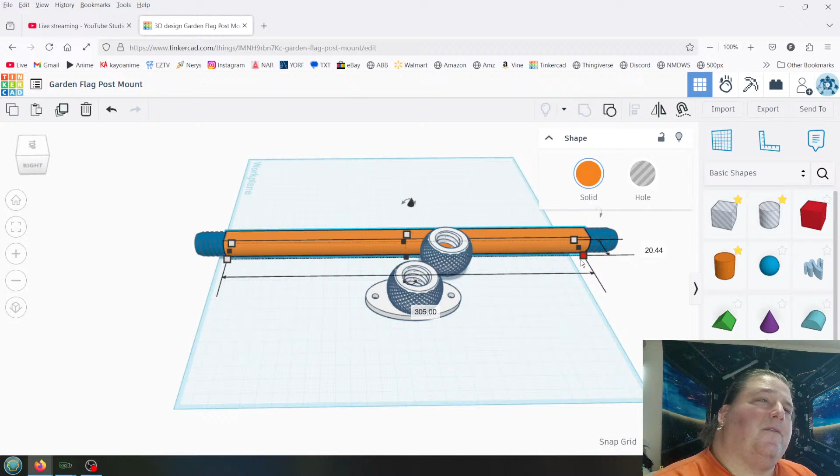So this is, actually I gotta split this. So this ultimately has to be, I can just trim this. You guys can't see what I'm doing, of course. So this has to stay 305 millimeters long.

Nice. You can get slightly cheaper than that. What really annoys me is that the company I'm with...

The tablet, I actually got a SIM card for the tablet. $10 for 10 gigabytes, data only. Which is fine, the likelihood of me using more than 10 gigabytes is very small, because I'm mostly on Wi-Fi. But they also have a $5 no-data plan that comes with unlimited minutes and texts. Why don't they give me both? $15, unlimited talk and text, 10 gigabytes of data - it's the same price, but I have to use 2 separate devices to get that. Unless I can find a triple SIM phone, where I could put 2 SIMs in it plus an SD card. Usually phones are dual SIM, but one is a dual-purpose SIM or SD card slot, and I need the SD card because I have a 500 gigabyte SD card in my phone and I use it.

Good afternoon, 3D Medic Vince.

I wish there was a way I could merge those 2 plans because $15 a month would be perfect, it's everything I need. So right now - and it looks like it did finally reset, the phone looks like it's working again - I'm paying $9.25. Oh, there's plenty of triple SIM devices for phone. The tablet doesn't need a triple SIM, I don't need phone calls on that. But there's plenty, there's even quad SIM phones. But I need a flagship phone with triple SIM so that I can have my SD card plus my 2 SIMs, because then I could just have 2 separate SIMs. But right now I'm paying $9.25 a month, and I get 1,000 minutes, unlimited text, and 4.5 gigabytes of data. I typically don't go over 2.5, 3 gigabytes of data per month, so that should be plenty. And because I work from home, I'm mostly on Wi-Fi.

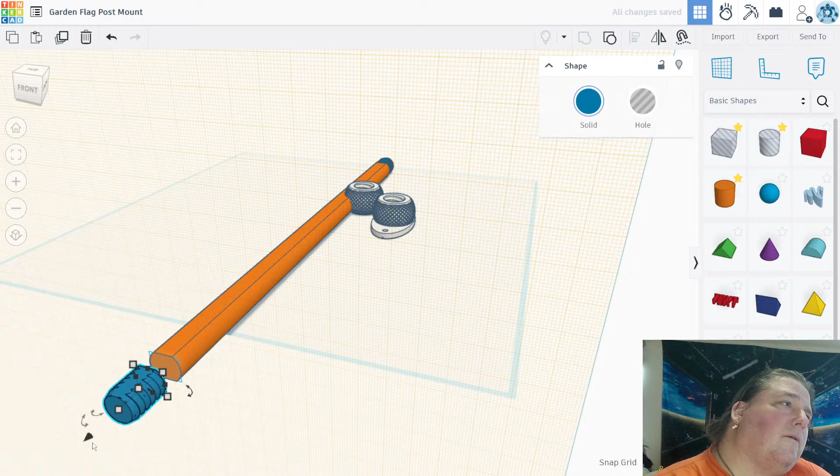So I need to make that still be 305 millimeters. So now we can do a group change. Let's go down to 19, and then change this to 305. And bring you over here like this. I should be able to bring you to 0. There we go, this way I change the length without altering the threads.

Grab both of you and join you together. Bring you back to roughly the middle and rotate you 45. And we are mostly good. There we go. Okay. Now I might need to upsize these just a tiny bit. Let's do that so we have a little bit of tolerance. Let's go 19.2, just so we have a little bit of scaling tolerance there.

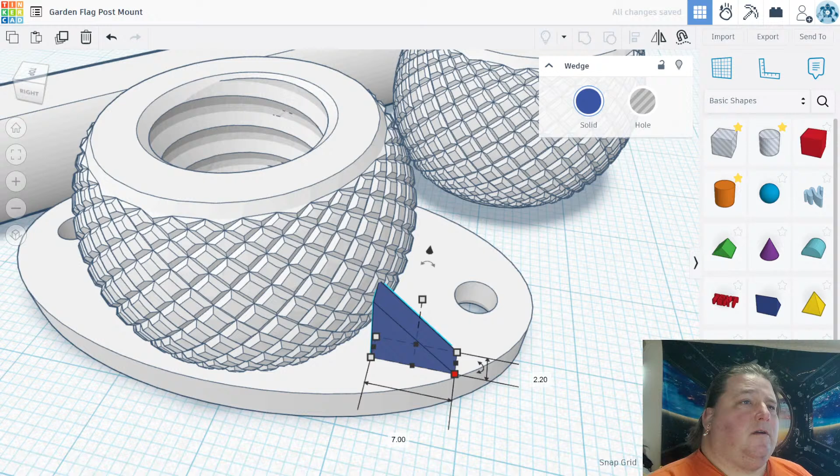Okay, I also wanted to add some reinforcement divots on here. How wide is that? Nope, it needs to be 2.2 in order to make sure it's as wide as the thing is. Let's do this. Good, now this should be equidistant. Yes. Let's shorten you, crease the sides, increase the radius. Oh come on, stop being a nudge.

Go there. Now we take this and this, align it this way. We are fully impregnated, we're good. Now we take this and rotate it 45 - 22 actually. Control D. Do this and this. Good, this. Control D, add this, rotate 180. There. Get rid of that. Now we have our little gussets, just to make sure if this gets tugged on, it's less likely to snap off of this. It shouldn't, because of the way I sliced it, but just to be sure - I want this to last a long time.

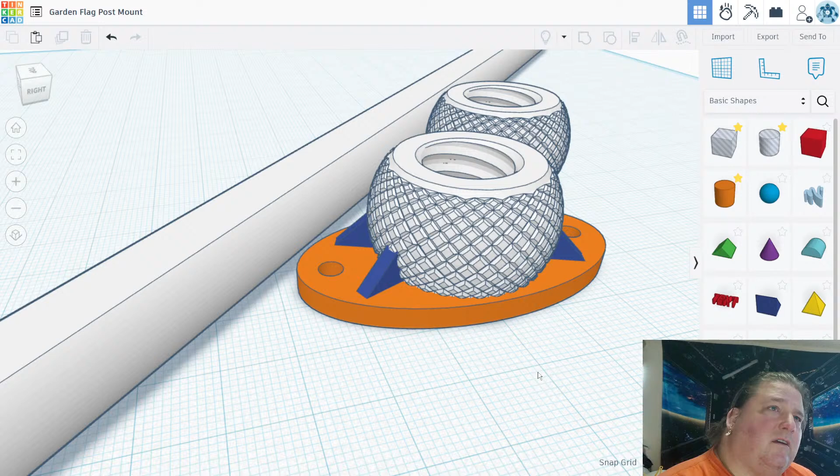Hello, Brian. How are you doing?

Now I also need to adjust the holes. Okay, did these get messed up? Possibly. What's that attached to? Oh. Yep, 0.02. Let's get rid of you. Let's hide you.

Okay. Four might actually be okay. So let's take this and this and do this. No, do this, let's go to 8. Okay, we need a little more, let's go 10. 5.14, that's good. Okay, we take these two - actually all three of these - and center them on this. And then we join them together. No, that's not what I wanted. I wanted these joined together, not the centerpiece. Okay. Oh, I think that's a bit too much. Let's undo that, yeah, it's a bit too much.

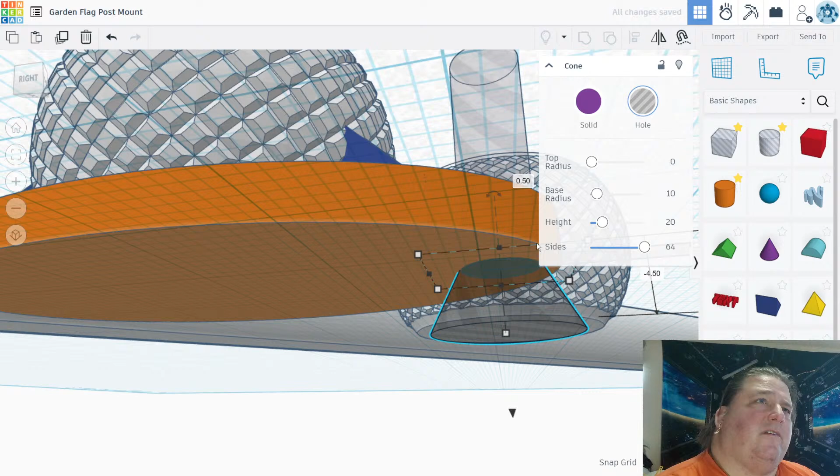Okay, let's join these four together. Now, Control D, join with this one. And then we take this and rotate it 180.

That was too much. Why do that? Ah, oh, Jesus Christ.

Okay, now we unjoin and then rejoin, since I want that to be a single operation. Join. There we go. Good.

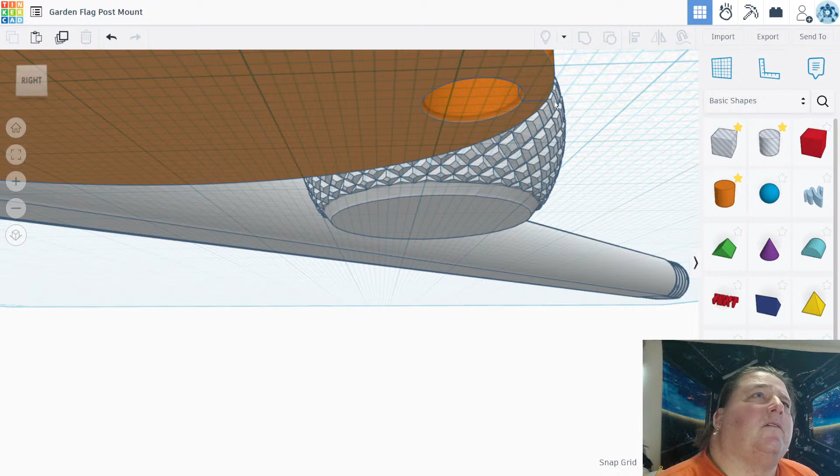Although I think I need to bring them in a little bit. I think that's a little thin right there. So let's bring this in 1. Let's bring this side in 1. Negative 1. Much better. Okay.

Now I should be able to grab all this and join it.

That should do it. Now, there is something else I wanted to do. Well, if I can make this small enough, I won't have to do that.

So it's 11 millimeters. I could chop more off of it. I wonder how much can I get away with chopping off of that?

So let's see if I could take a millimeter off of each. So negative 1, and plus 1.

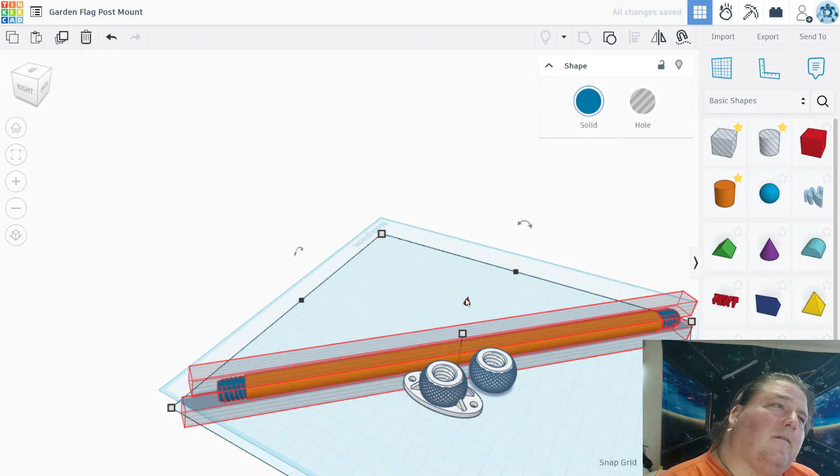If I take too much off, it'll wobble. We don't want that. That makes it 10.27.

Really, it's off the... see how it does that? It's off the damn screen. It's like, why? Why does it have to be off the screen? You should be able to realize that it's off the screen and move it. Put it on the screen.

Really? Okay, let's try that. Garden flag, post mount. And export.

Oh, no, no, okay, that's just the alignment, okay. I thought it added an artifact, but it didn't.

See, I also don't want to make it too thin, because if I make it too thin, it might get wibbly wobbly when you go to slice it, when you go to print it. It might flex too much, and we don't want it to flex either.

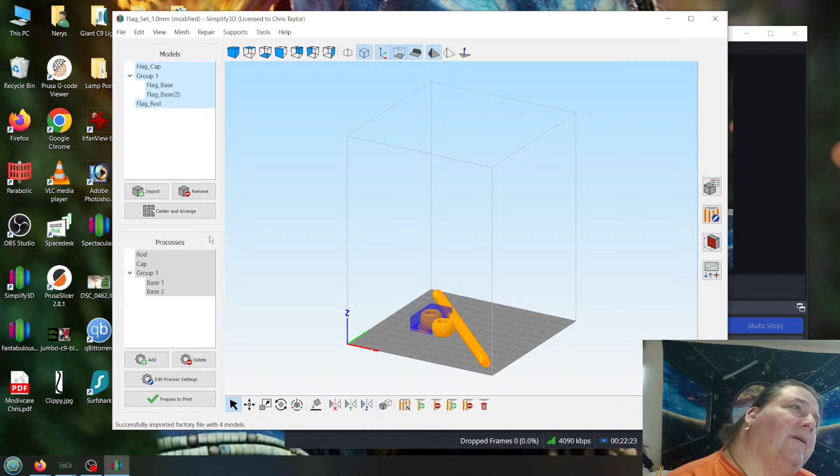Okay. Recent. Flag set, 1 millimeter. There we go. I think I can just put it all under 1. Let's see how it slices if I don't do my little trick.

Good. 0.4, 3 solid top, 2 solid bottom, 2 perimeters. There should be plenty. Infill, I think 10% is going to be okay because of how heavy duty this is.

Oh, that's weird. How did that happen? It's not touching the ground. What?

So it's lifted up off the ground. The first layer has nothing somehow. How does that happen? Well, first let's see if that's a problem.

So mesh, separate connected. Whoa. Okay, we got a glitch. That's fine. Okay, those are separated somehow.

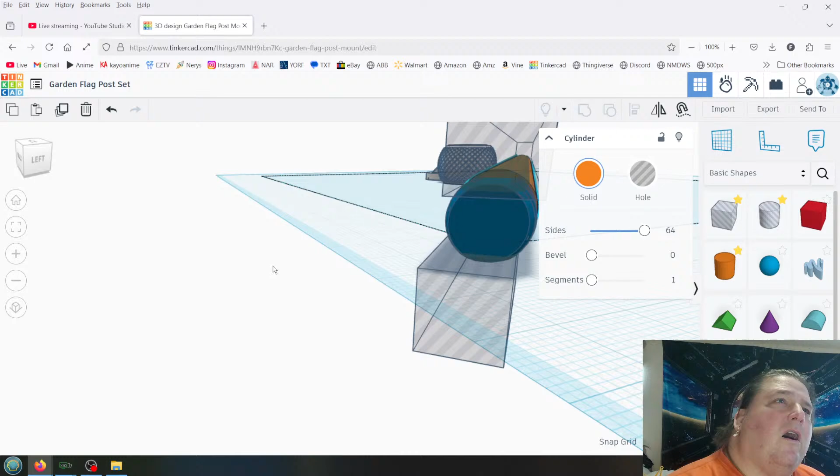Oh, the alignment got all screwed up. No, it didn't. No, it looks okay. Well, this could definitely be smaller.

So let's put a piece on the end of here. So let's make it 305. No, actually, let's just move these. Can I change the width? 1.4.

We'll shorten that a bit. Okay. Let's make sure we're covering everything. Now we have to move this.

Negative 0.2. Basically, they weren't embedding into the end of each other. Every now and then it does that. Even though I put it on a zero plane, it's just a Tinkercad thing. Just every now and then it does weird like that.

So now I have to force them to overlap to make sure we're actually overlapping. Now, let's make sure we're actually on the zero plane.

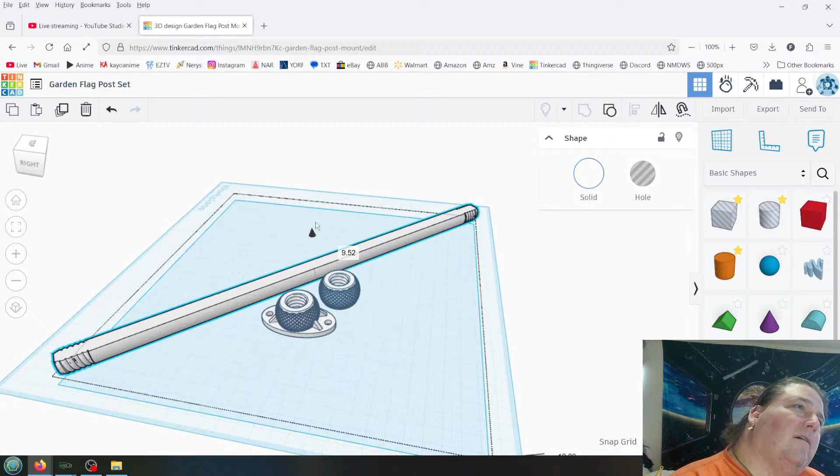Really? Now you're down here? Just loves messing with me. Let's make sure you're on the zero plane. 0.

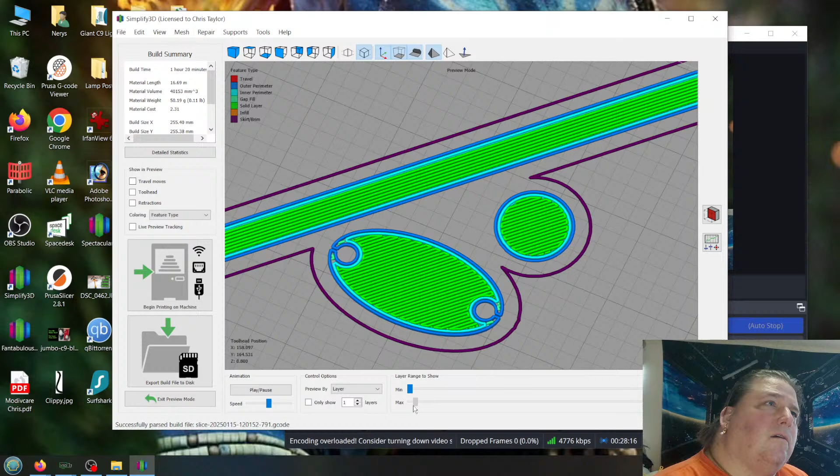Oh, that's a problem. Yeah, alright, I gotta separate them. No big deal.

Oh, how tall is that now? Let's see. That is 3.49. Let's make it 4.

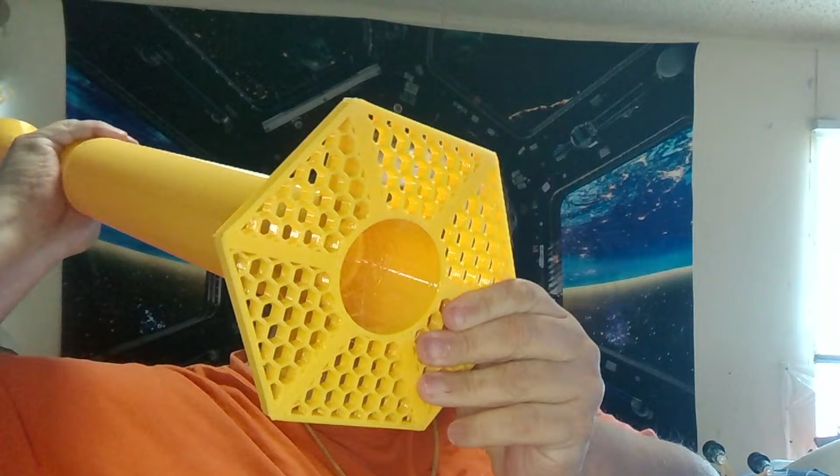But yeah, that's the solar lanterns. And of course, you can make a tall one if you want. So if you want a really tall one, you print this base for a more rigid, more structurally sound base. And now you can print them big too. You can make them 7 feet tall if you want.

I finally ordered the 5 hanging lanterns and the solar powered RGB IC strip for the big giant one that Big Bad Joe sent me the 2 rolls of filament for.

And my print speed in vase mode, I do by volumetric speed. What was it, 9 cubic millimeters a second. And so the speed changes depending on the layer height. At 0.4, I'm doing about 20 millimeters a second. But keep in mind, that's faster than a Bambu printer.

A Bambu printer can't lay down plastic that heavy. So for you to print, for example, this piece here takes 1 hour and 30 minutes to print.

If you were to print this on your Bambu printer, you would have to do 2 perimeters at 0.2 millimeters, which means even though I'm only going 20 millimeters per second, that's equivalent to you. So it's 1, 2, 1, 2. You'd have to print at about 90 millimeters a second to equal what I'm printing with a 1mm nozzle. There's just nothing you can do to compensate for flow. That fat nozzle is just awesome.

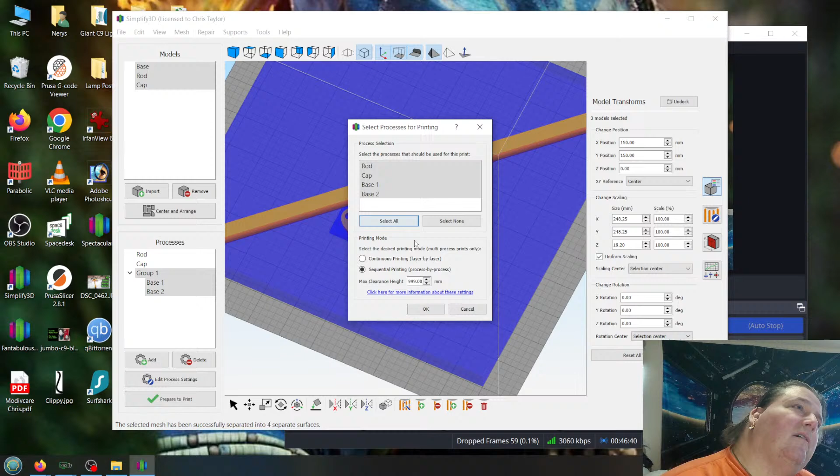Where did I mess up? Select models - that's just a rod. Select models - that's just a cap. That's, oh yeah, base. Unless... that's why.

There we go. Oh, I got it longwise now. Nice, that's the way I wanted it. Hour and 21 minutes, 52 grams of plastic.

That looks good. Good infill. That's not supposed to do that. Okay, that's right, I gotta duplicate the base. I forgot about that. It forces me to do that in order to get the proper top layer.

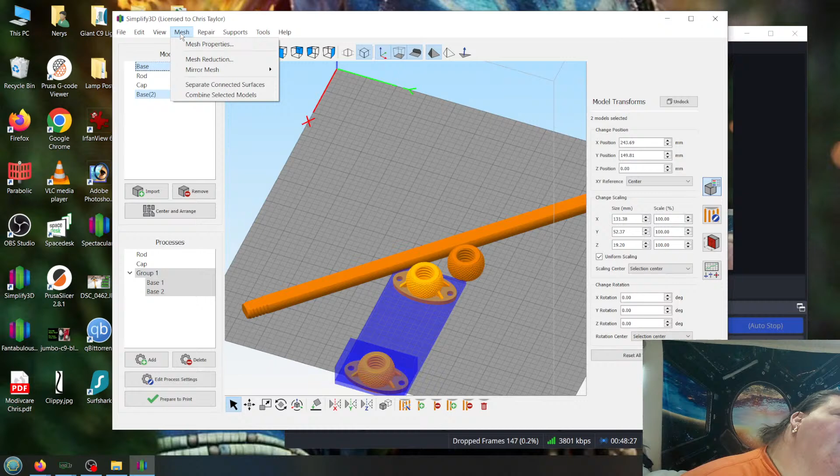Can I do this? Yes, okay. Let me group these together. They were in two different positions, that's why. I gotta fix that.

Okay. There we go. Now we should have, good. See, now we have a proper... oh, I don't want it doing that. That ain't gonna work. Continuous.

Weird. There we go. There we go, now we have a proper amount of infill. We have our top layers.

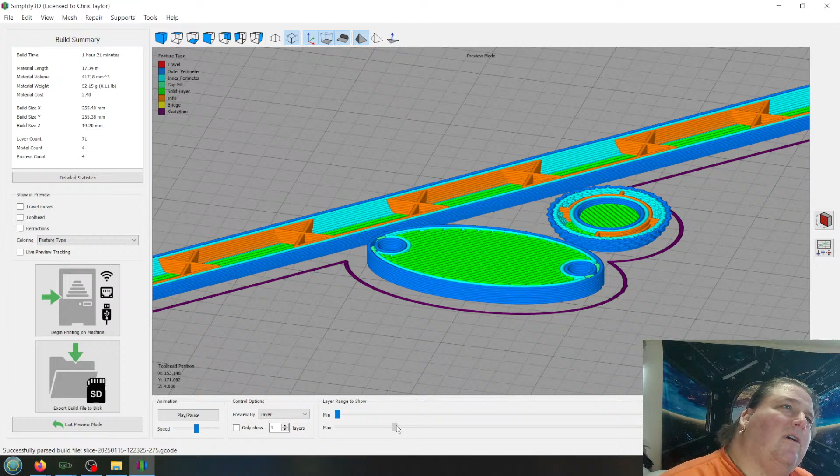This is no good. See, I do have two perimeters, but I'd like these perimeters to touch. I'd like to have one more perimeter inside of here. So I'm going to adjust this again.

How do I guess I have to do... oh, it already is. So I gotta move this 1 millimeter closer, and move this one 1 millimeter closer.

Why are you doing that? Don't be an asshole. Negative 1.

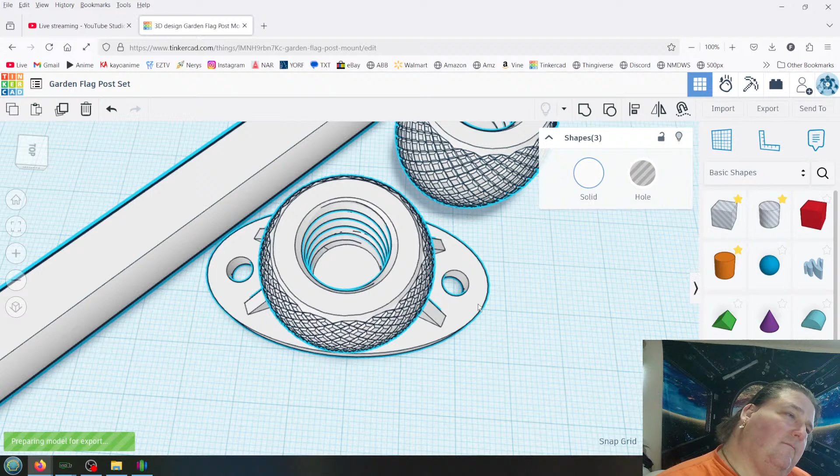How's Amazon doing this week? While we're waiting for that to load. Eek, not good. $20. January is always bad. Let's see here.

Okay, we can delete you. Now I don't have to redo the rest of them. All I have to do is this.

I got more glitches. Like, what are these little bits that are here? I don't know what those little bits are, but it must be glitching somewhere.

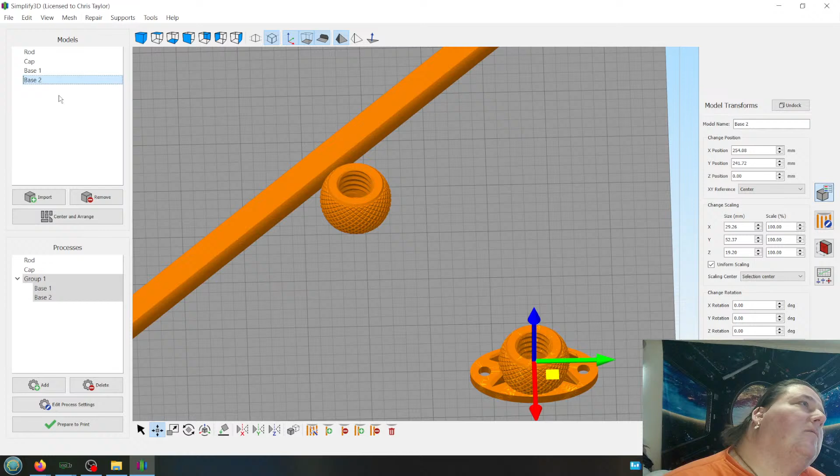Let's group them. Let's bring you in here. Like that. We have to reset this to base 1, and this to base 2. These should still be correct.

Yes. Okay. Select all, continuous print. There we go.

And do we have... no, it still won't fill that in. Man, is it being a nudge. It just does not want to put a proper line.

I bet you I could trick it. Hang on, I bet you I can finagle that. Allow single extrusion. Oh, you're starting to piss me off.

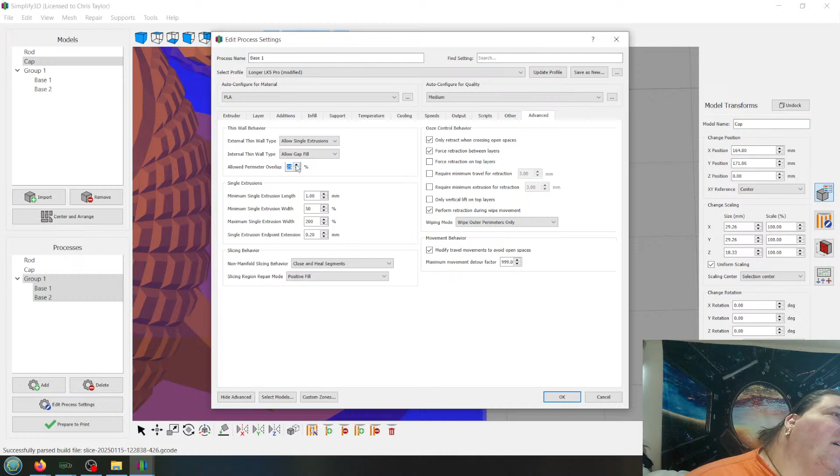Okay. Oh, now it's doing it as one big fat extrusion instead of connecting it. I want it to connect it, because that won't be as strong.

See, there's plenty of space there. It's probably half a millimeter. Half a freaking millimeter. Oh, you nudge. What a pain in the butt.

Now, where is my little glitches? I want to see if I can find those glitches too. That looks fine. Yeah, that all looks good. So why is it glitching on me?

Unless... nope, I'm fully... yep, it's fully merged. I can see it there and there. I don't get why it's doing that. It's annoying.

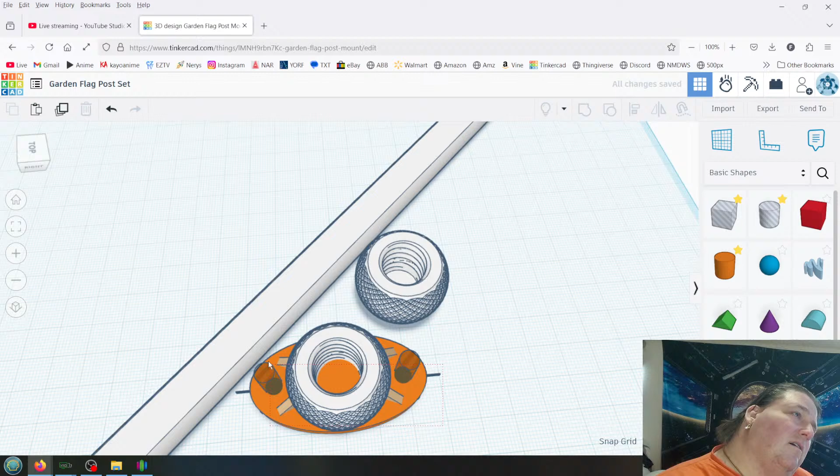Let's go 1. And go negative 1. Okay, export STL.

Nag. Yeah, you're a nag. You're a nag.

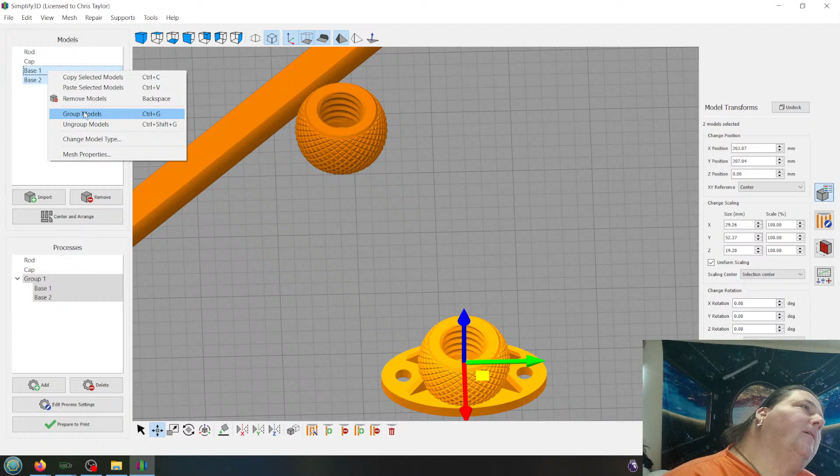Base 1. Base 2, group, base 1, base 2.

Okay, now can I do... no, continuous. Good. Okay.

It still won't do it. Oh, no, it is, it is. It's not filling it in now, which is really freaking annoying. But it is 2 perimeters. Oh, that is so annoying.

Allow gap fill. That's obviously big enough. I keep clicking base 2 and I need base 1. How about this? Overlap 50%.

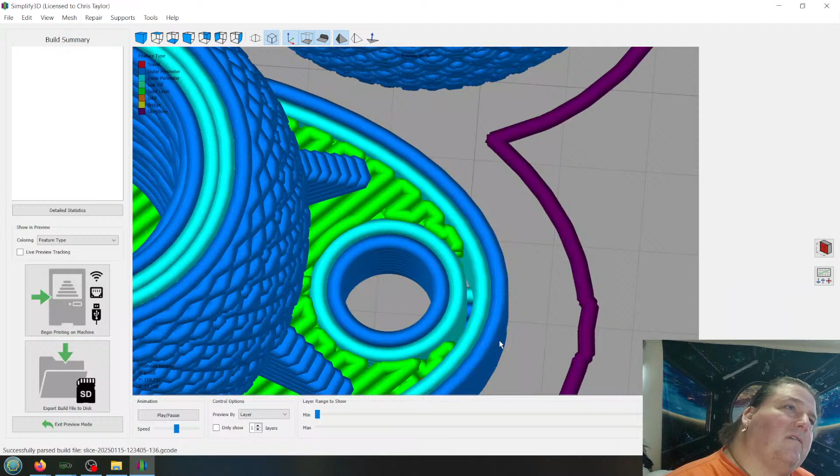Go ahead and try to tell me that's less than a millimeter. It still won't fill it in. That's obviously almost as wide as this. So with a 50% overlap, it should do gap fill in there.

I mean, it's not a big deal, but it's annoying. Because I know it should work.

Allow single extrusion, maybe that's it. No, I already tried that. It didn't work.

But that should work. How about we go 99? Now what are you going to do? Is it because it's fill? Okay, so clearly that setting is not affecting it. It just won't fill this in.

It's less than a millimeter, but still. I hate the fact that that's not filled in. I really, really hate that.

I know what I could do to fix it. I could push it back another half a millimeter, but I don't feel like it. That's more than connected enough. So screw it, we're going to leave it alone.

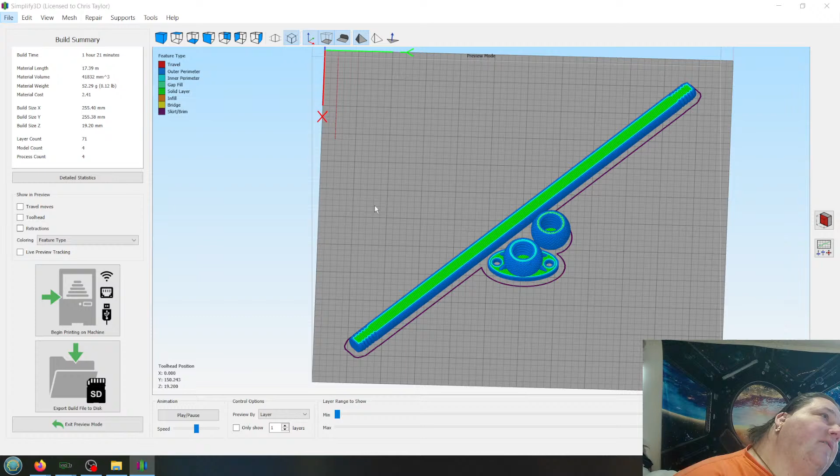We are going to do garden flag, post, G-code, flag set, 1 millimeter. Okay. But now we're also going to do the individual parts. So this will be the base.

G-code, 1 millimeter, flag base. And then we're going to do the cap. This is so people who want to print individually, they can print them. Cap. And then do the rod. And then do the full set. All right, all the G-code is updated.

I'll have to print that, see how good it is. See if this is strong enough. It should be. It's a 2 millimeter thick wall, 3 millimeters thick wherever the infill overlaps, which is almost the entire surface area. That's why I made the infill separate here, so it would do it like this. That should be ridiculously strong, even this thin.

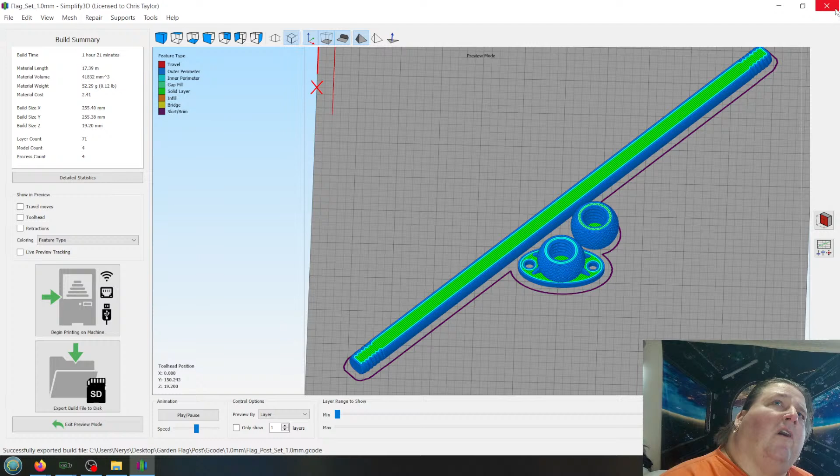So I'll just have to print it and see what happens. Okay. Now, something else I want to do is try to make the garden light... not the garden light, the lamppost, the 7-foot lamppost, threaded. I would like to make that threaded. So instead of having it screw together, I would like to have it thread together. What's the easiest way to make a thread that big? Do I just scale up my existing threads? Would that even work?

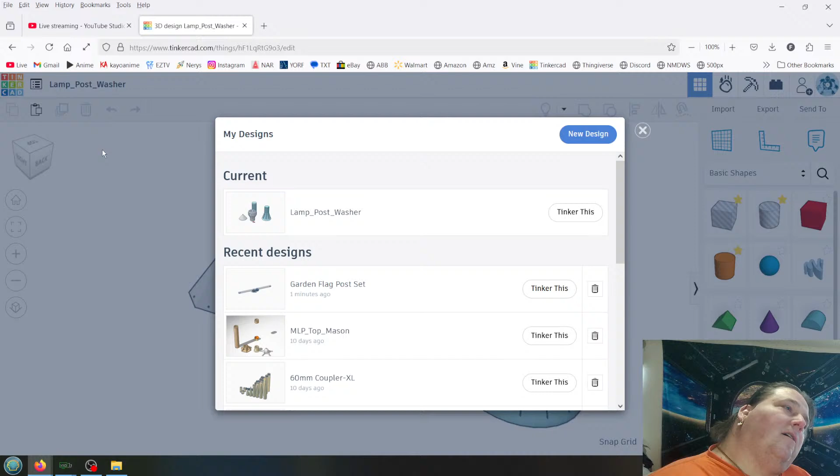Would use, but if you're going to print something this big, the little extra plastic's not going to matter. It'll also really beef up my joints too, because they'll be overlapping. Okay, so what do I need? How big is this? 140 millimeters. 140, that's 6 inches. I already have one that big. I already have components that large. But I can also use this.

Okay, so what I need is this piece. Copy. Let's go new design. You guys can see this, right? Yes, okay. So let's separate this into its constituent components. I do not need any of this. All I need is this and this.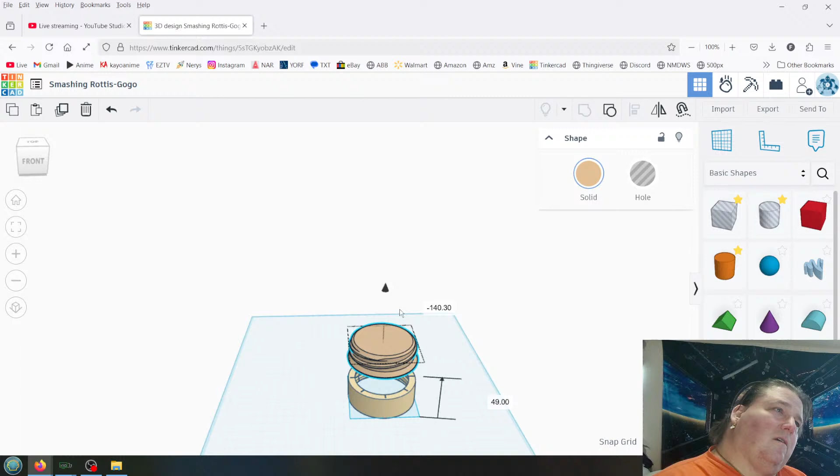Okay, now theoretically I should be able to just scale this, as long as I do both. Okay. How tall is that? It's only 49 millimeters. That's not that bad, I can live with that.

Now this part here has to be double wall because the thread is on the inside. This part is single wall. Okay. Oh, I didn't realize that this is not fully cutting into it. Oh wow, I didn't realize I goofed that up. Unless it has to be that far in order for this to work.

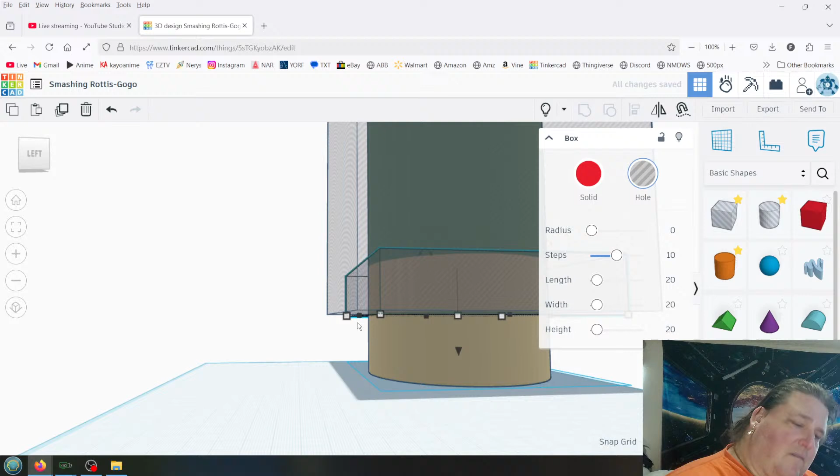Oh, this has to all be changed too. Duh. Because the offset is all wrong now. Let's just get rid of you for now. Really? So that means I could just extend this, and just get rid of that. I think I'm just going to get rid of all this and start over. Yeah.

So take this and this. That is not what I wanted to do. What did I just do? I have no idea what I just did. This and this. And, actually... nope, I can't do that. The hell?

I guess I could do that. Then I could just delete all this. That is all wrong, see this? I hate when it does this. See how I got this little flange here that just shouldn't be there? Oh, I hate that so much when Tinkercad does this. It doesn't exist, it's like 0.000000001 millimeters thick, but I have to get rid of it.

Oh, that didn't work. Let's do this. There we go, that's what's supposed to be there. Okay.

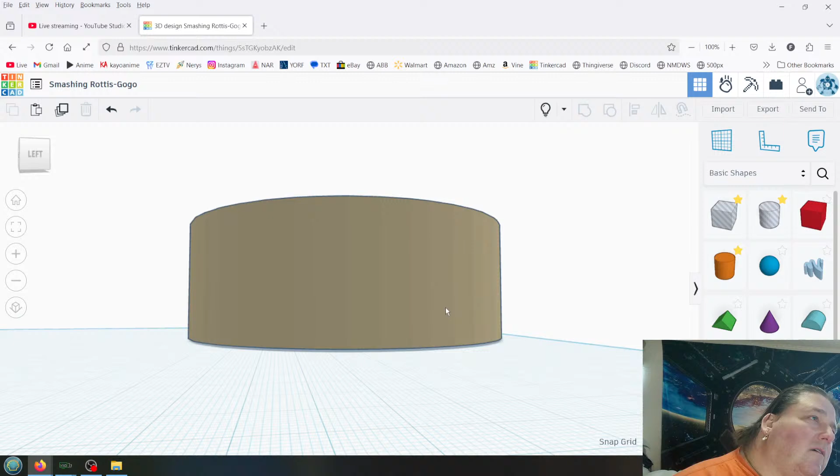Alright, now what I need to do is put a master ring down. Center. Of course, it's over here. Oh wow, why wouldn't it be on the other side where I could see it? Nah, it's got to be over here. That makes perfect sense. It's like, come on, work with me.

Okay. Align on you, center, edge. Then we take this and we move it 1.9. 1.9. That is not what I asked you to do. You just ignored me, which really pisses me off. It's just like, I'm going to pretend you didn't do that.

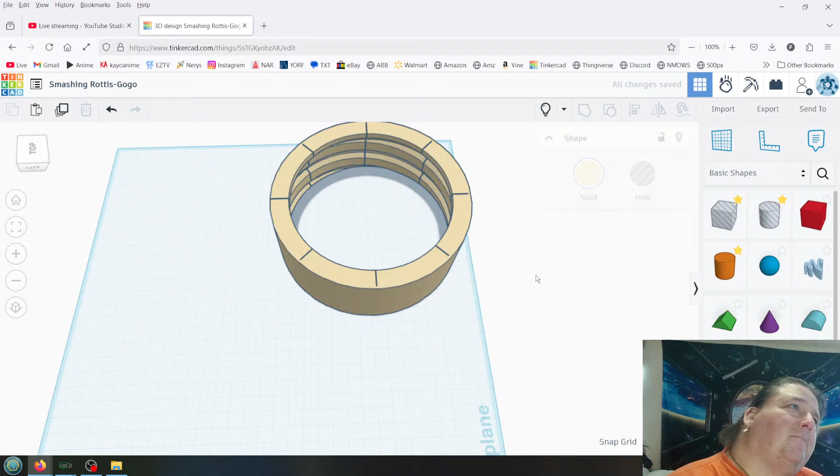Control D, and I believe we're doing double. Yes. And then this one is going to go outside to complete the vase. Okay. Let's undo this, join these, then add this, and join those. There, that is properly cut. How tall is this? 47 on the dot.

Good, let's bring back this. I don't need to align them, but let's do it anyway. Okay, copy. And now we come into this one.

Okay. How do I want to do this now? Let's copy this. Control D.

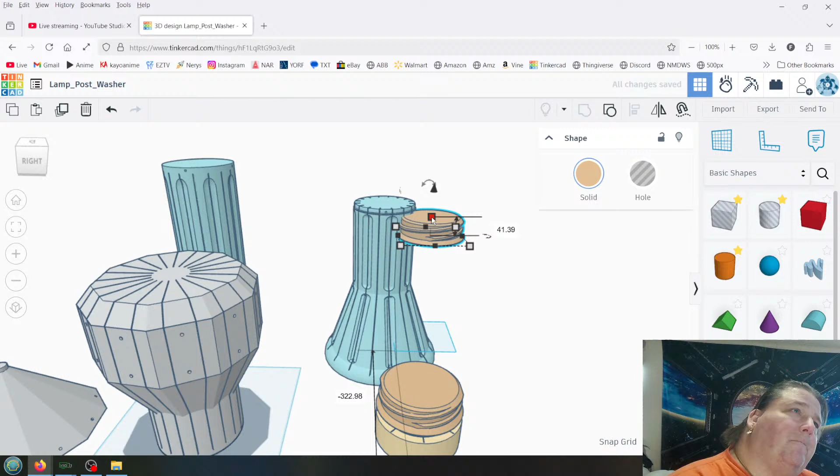So if this is 47 tall, that means I need to be 252 high. 252. In order to make sure the... no, that's incorrect. Oh, it's 41. So 267. Okay, so I need to make this 267 tall.

Let's see, do I have this shaped? Sort of, I'm probably going to reshape it. So that means I can just delete all this? Why am I offset? Oh, because I have it to match these.

What is that separation? Is it 1.25? Yes, okay. So my shift is 1.25.

I didn't do something weird, did I? Yes, I did. I need to rotate the whole thing. 1.25.

Okay, now I should be able to delete everything except this and this. What? That is certainly not what I wanted to do. These must be all joined. They are. Jesus, come on.

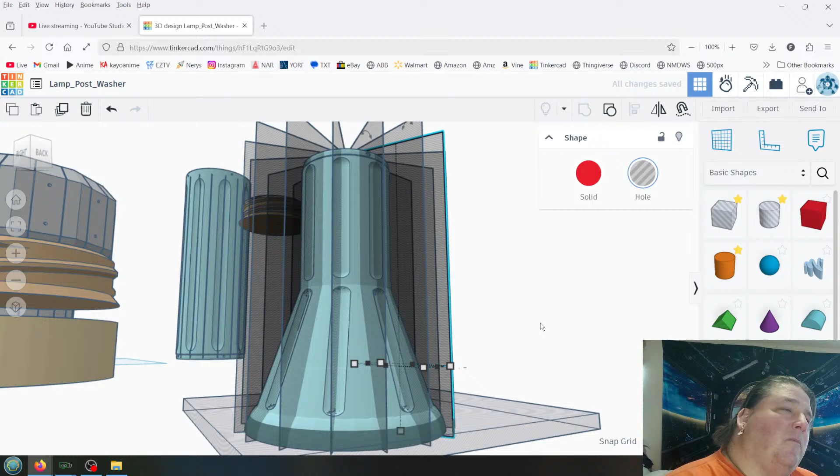Oh, that's right. I clipped them off the bottom in order to avoid messing with the base layer.

Okay, that should be properly aligned. We need to take this and disassemble it by getting rid of that. Alrighty, we need to take these and make them go away, since we're not going to need them anymore.

The 7-foot tall lamppost that I designed, I'm redesigning it to get rid of the screws, to make them thread together using big giant threads.

Okay, do this, we take this group. I don't think that has everything selected. I guess it does, yes it does. So this is going to have to be a whole lot shorter.

Deselect. Delete this. Okay, I got both of those. I need them separate. There we go.

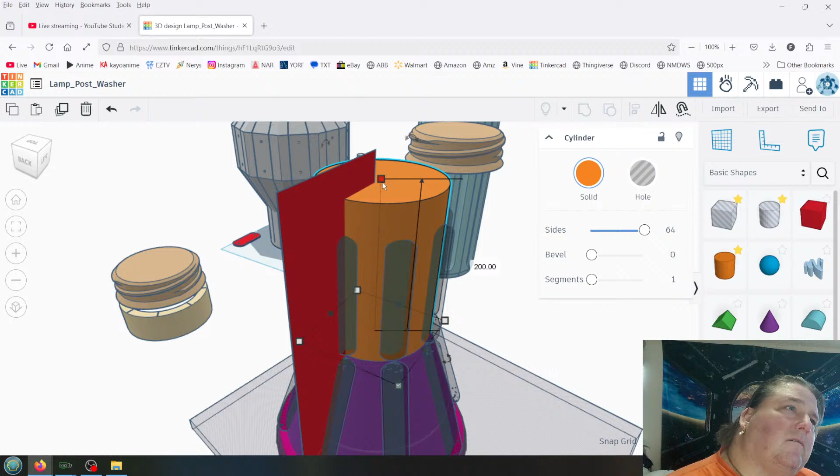Align you on you. There and there. Do we have an overlap? Yes, we do. You got to be kidding me. There it goes.

Do I have a gap there? Yes, I do. Oh, no, we have an overlap. We're good, I think. Let's see if it joins. Transparent, and yes, we have an overlap. We're good, okay.

Now we take that and we join it to this and this, and we join them together. Object exceeds the boundaries. You're just being an idiot. Oh, that's the plane, okay.

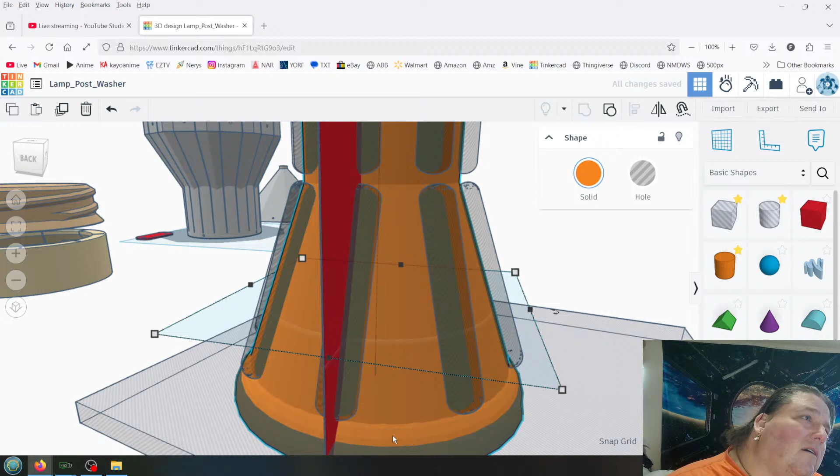Why won't you obey? What is that? The work plane is still in the wrong spot. Oh, wait a minute. What am I selecting? Why is it through here? Oh, we're down below the work plane. I didn't even realize that.

Okay, so we take this and this. We join that, that keeps it from tearing apart our bottom. Why is it telling me I'm outside the work plane when I'm not?

Let's... why are you selecting that? There, now we're on the work plane. Okay, that looks good.

So now what I need to do is take this, let's hide it, make sure we are good. Yes, we are, okay. Take this, duplicate it, shift it 10 millimeters, make it hollow, and cut it into this. Cut.

Turn this into a hollow, and now we rotate it. But I need a master ring to do that.

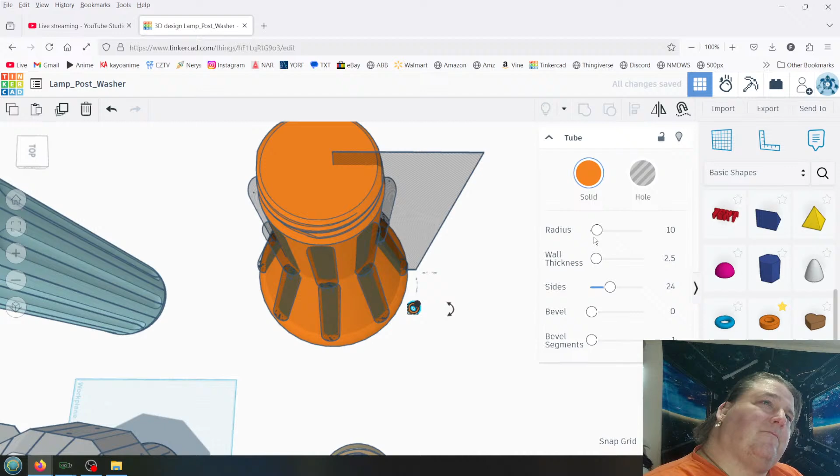Oh, we're right on the edge, that's why. Control D. Not Control D. I don't know what I meant by Control D. Align on you, center. Center, you and you, Control D.

I think I need to do a 22. Yes. Okay. One more. Now I can delete the rings.

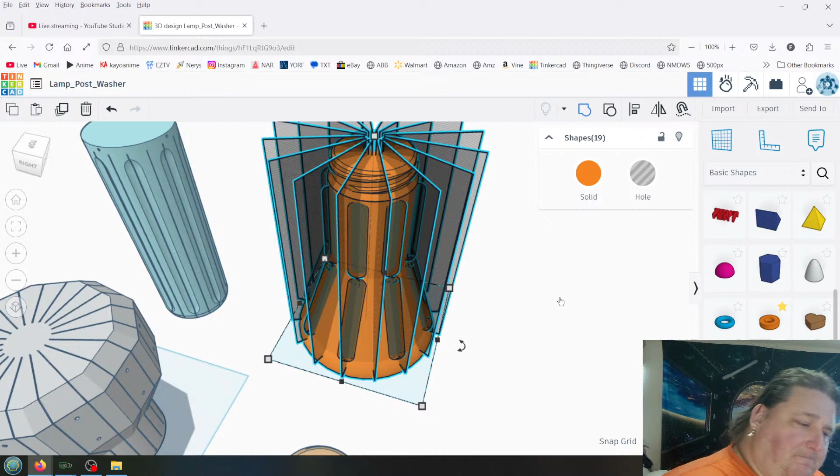Okay, I should be able to just join this. I might have to put the divots in first. Yes, I have printed one.

Where is the phone? Here it is. Actually, do I have it downloaded? I might have it downloaded. Yep, right there.

I bought the light that's going to go down the middle of it, and I bought the hanging lanterns as well. So this is going to have 100 LEDs, I think it's 100 LEDs going down the center, and it's going to have 10 lights on top. It's going to have the 5 little ones and the 5 big hanging lanterns, all solar powered.

This has been sitting outside in 20-degree weather, getting snowed on, and it doesn't care.

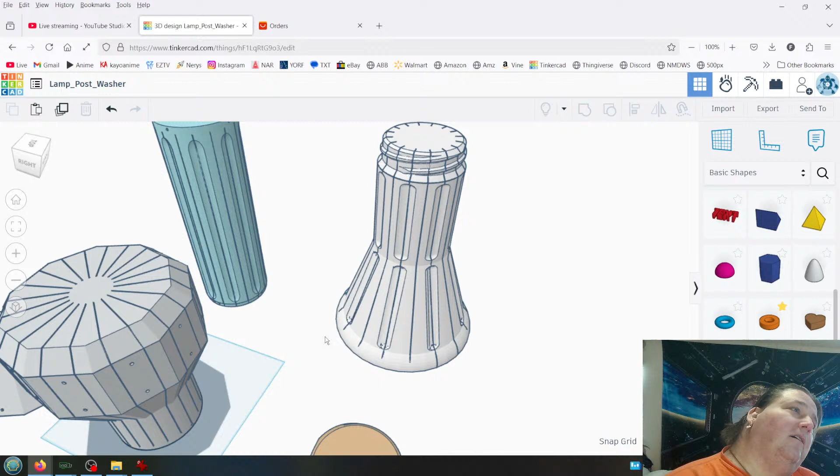Oh, the drill? Well, for what I'm going to use it for, it'll last forever. I'm going to be using it for screwing together plastic parts like this, doing work on my plastic stuff. That's not a heavy load for this equipment, it's not going to be a problem. If I have real work to do, I have my DeWalt and my Ryobi's. And if I have real heavy work to do, I got my high output Milwaukee that can take the lug nuts off my bus, okay? So you use the right tool for the job, that's all, no big deal.

Okay, so this should be done, let's see if it slices. Lamp post base. Would you let me pick the base, please?

I think it's actually called bottom. I don't care, let's make sure it slices correctly. Actually I needed that. Let's see, I already have the lamppost, B for bottom. Yes, discard - that's my custom G-code all set up. Let's remove this and add the new one, and let's see if it slices.

Oh wait a minute, this does not need to be done this way. That needs to be done that way. This one needs to be moved. First, what's this? We are doing 0.8, which is way too high.

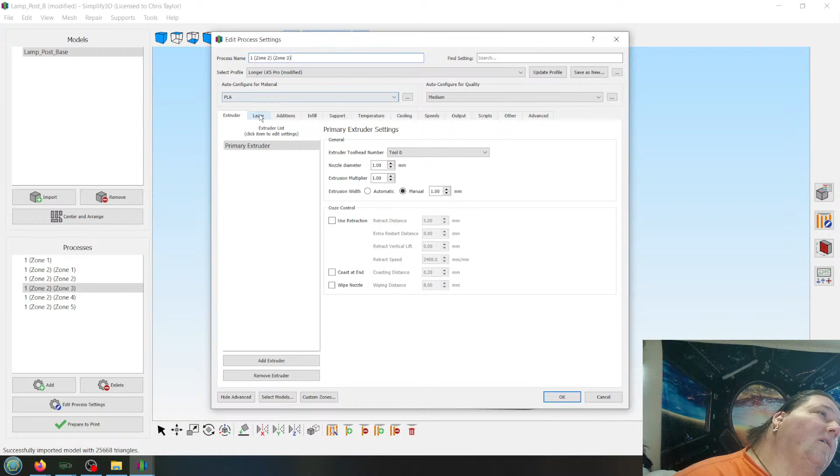That's good, that's fine, this should be set to 0.4. Yes. This should be set to 0.8. Although, you know something, I'm going to go 0.6 because it'll go faster to make up for the difference in layer height. I figured out that the difference in time is very minimal. And this should be 0.4. Yes, this should be... let's leave that at 0.8. I want that to be super beefy.

What, 16 hours, I think? Yep, 16 hours 54 minutes. Okay, let's make sure we have no gaps. No gap there, no gap there, no gap there, no gap there, and no gap there. Okay, good. There. That is all proper.

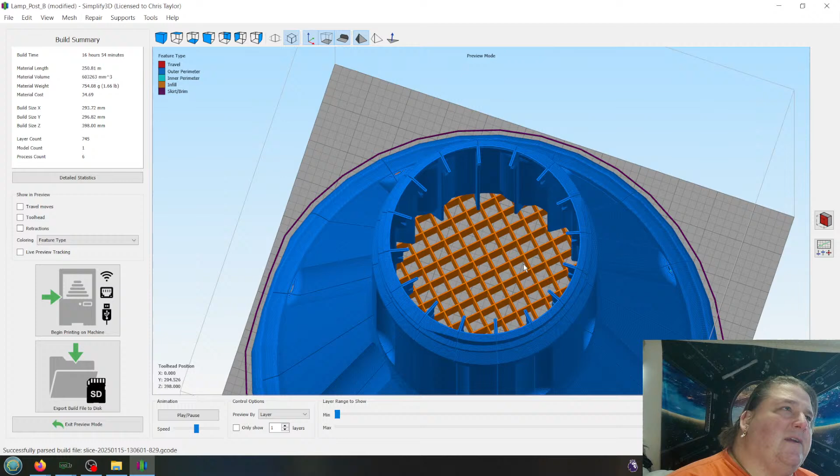These actual indents here aren't needed, but it doesn't matter, it's not going to affect the print time. As you can see, you have your big infill bottom there, that's so you have something to attach this to. You have a way of attaching it to the ground. You could even go so far as, if you don't have crazy winds like I do, you could put bean bags in here, sandbags - just fill up some little canvas bags with sand, or freezer bags with sand, and just drop them in there. You put 30 pounds of sand in there, that ain't going nowhere.

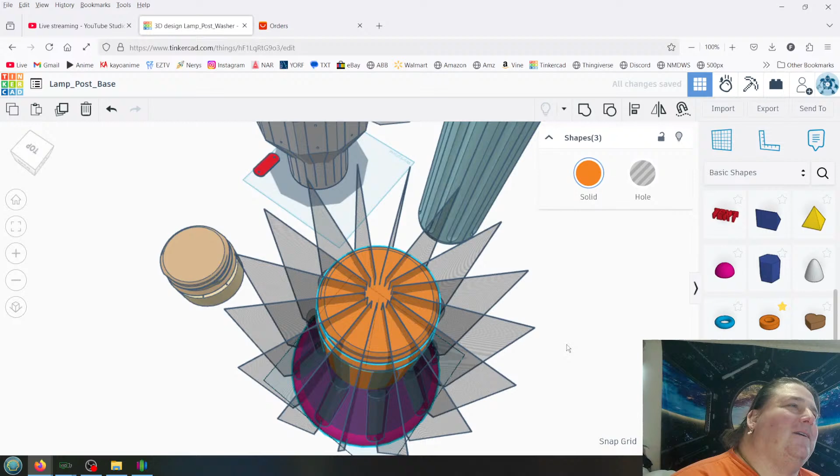Oh, this must be off the edge. This must be just outside of the workspace. Yep, look at that, look at that - it's just outside the work area. Wow. I gotta bring it just over a little bit. That's why it... whoa, what was that? That was weird. Screen got weird. It was just outside the work area, so it chopped the edge just a little bit.

You pain in the butt. That's why it kept yelling at me. Can I get away with just merging this whole thing? Let's see if it'll let me do that. It's either going to let me, or it's going to throw a conniption fit. Let's see what happens.

Come on, come on, come on. I guess I was asking a lot to have it merge all of this in one shot. I'm kind of abusing it a little bit. I'm beating the snot out of it.

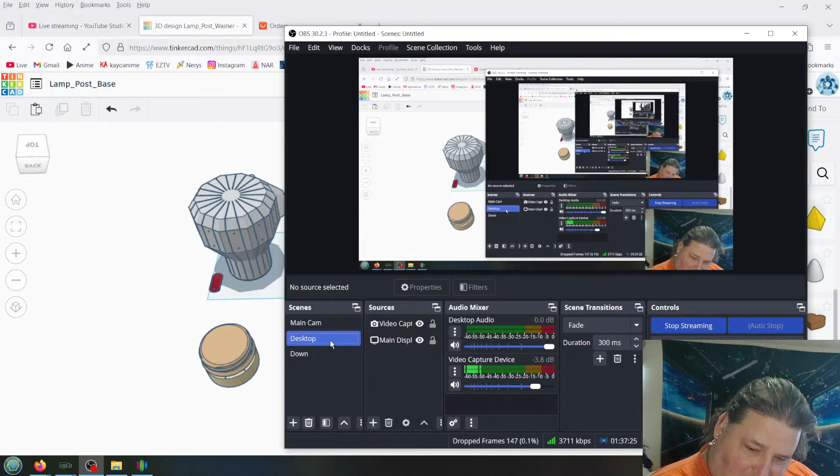Michelle will like this, I'll send that to her. You have 20 cats? Seriously? You are brave, dude, very brave. I'm Groot. That's ballsy, that's a lot of cats.

Oh boy, I think I pissed off Tinkercad. Let's go back. That might make it even angrier.

Oh, you got them all as kittens. Nice. Man, there's something about kittens, man. Kittens are awesome.

This one I could just raise it up higher and add my bottom because it's already shorter. Control D - so you're going to go there, and Control D. Both of you are going to go to that one. So this is 47, so we just got to raise this up - 46.9, 46.9, and then center. That should be all I have to do to that.

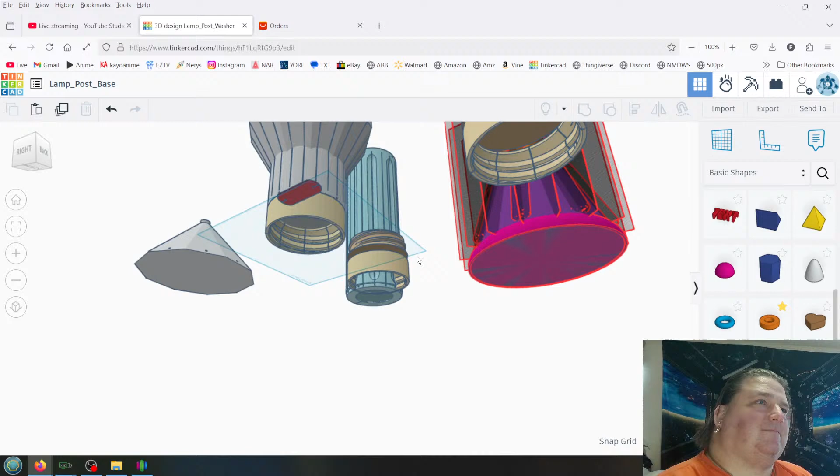I think I'm going to have to reload this and hope it doesn't destroy what I just did, because I think I made it mad. Oh, did it actually join? Nope, some of these are very broken. That was very much an incomplete merge.

Okay, so we take this and join it with this and this. I gotta get all these separate. Let's make this full screen. That's a lot of keycaps. Come on, work with me, please. I need to grab just you guys and join you into one.

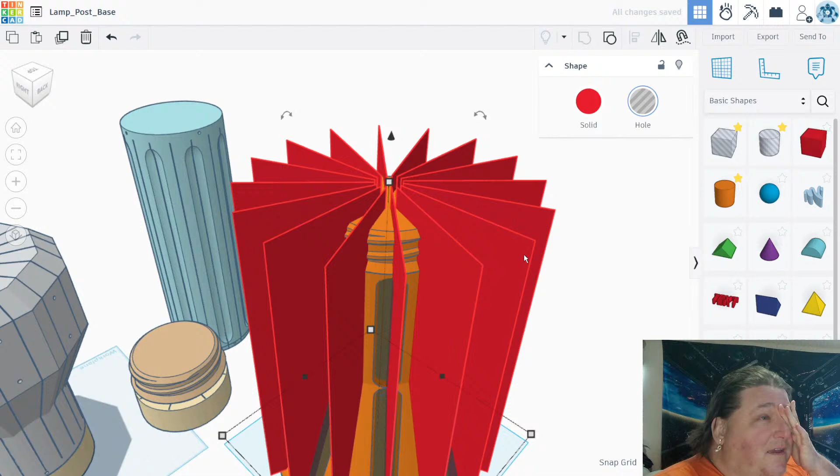I think this is hyper complicated now, but I'm going to try to keep going anyway. Okay, now we take this and join it.

Come on, it's not that hard. That's wrong, why is it doing that? Do you see how it's extending those? It should not be doing that. Yeah, see, now they're not there. Okay, it's glitching.

Time to simplify. Come on, come on, come on, come on. Finish merging, finish merging.

Okay, we take this, we export it as STL. And then we import, choose the file. It did it again. I joined it and it did that.

Okay, I've got to - oh, it's already taken apart. Come on, just give me this one. So I gotta select them all, then I have to deselect the one I want to keep. You punk ass little snot bag. Give me all of them. And then deselect that one. Delete.

I have to export this one, base one. Import, base one.

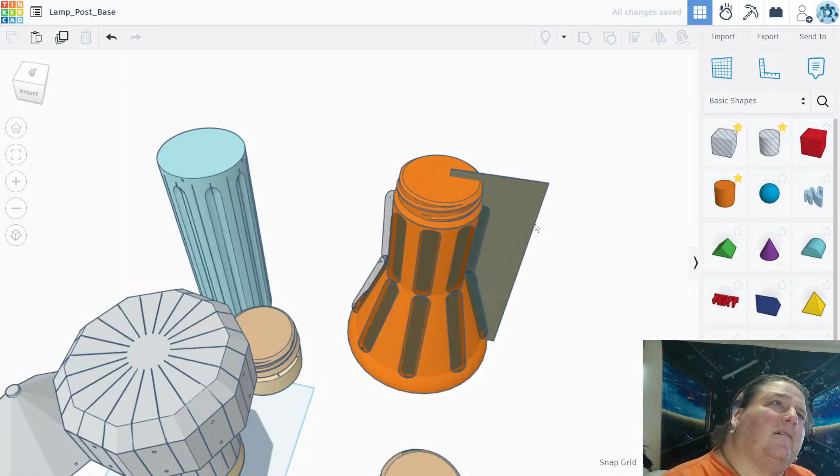We take these two, we align them on this one, this way and this way. Now the trick is picking the right one. Nope, yes, delete that one.

Now this is simplified. Now I need to make a new master ring. Radius, sides, scale.

Okay, everything inside? Oh, that's just slightly outside. Now we're inside.

Now we take these, and we duplicate and rotate. Doop, doop, doop, doop, doop, doop, doop, doop, doop, doop. Now that should be much more simplified.

Join together, nothing should get extended. Nothing did, good. Get rid of the ring. Now we should be able to join this to this.

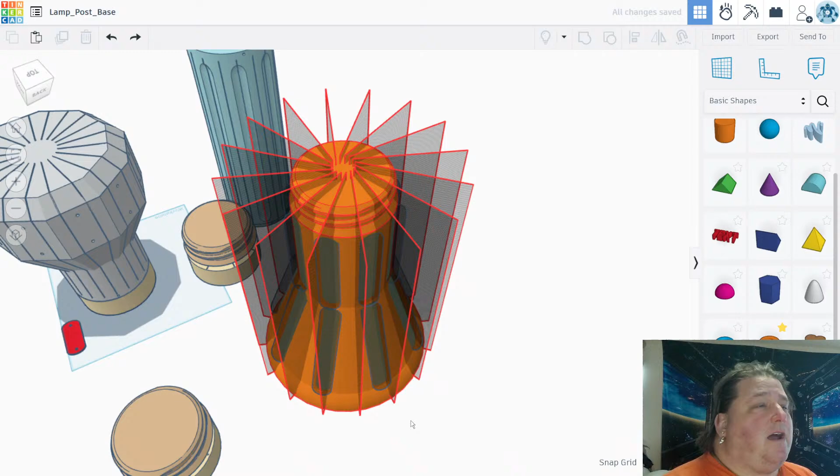That's a good cut. Now we take this and join it. Oh no, that's wrong, what the hell? Oh, I forgot to rotate it 11.25. Okay, duh.

Nope, that didn't do it either. What the hell? You see what I'm seeing? Yeah, that's wrong. Oh, that got all squiggly.

What the? Okay, that looks good. I gotta do a new one. That's just all messed up. Ah, shit, I forgot how high it was.

So it's 10 millimeters? How big is it? 20 millimeters. I don't know how the hell I screwed that up.

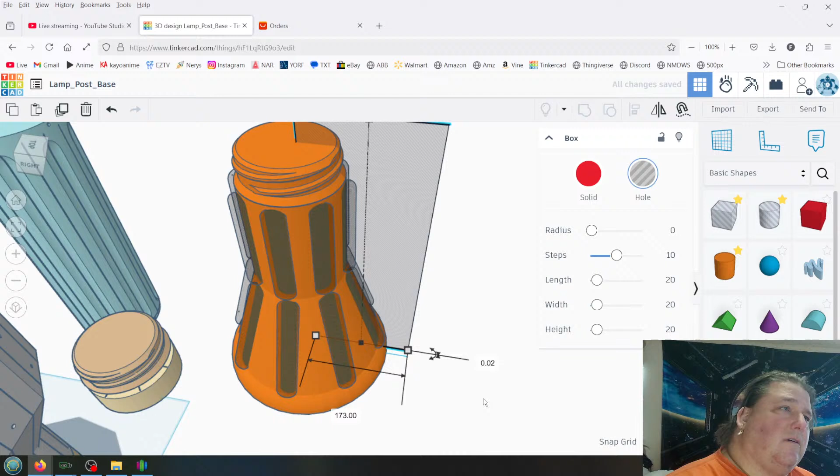So bring this up to 20, and then scale it. Two, like you and you. Align you. I screwed it up somewhere. I don't know where, but I did. I need another one of these.

So bring this in. Okay, now we take this. Control D, hollow, drag it this way. Why am I not seeing a number? There it is, off the goddamn screen again because it's a jizz bag. Okay, that, and this, like that.

And then export this. It's a single sheet, come on, it's not that big. Come on. Stop being a nudge. Oh, it's just freaking cold. Come on, save it, you stupid computer. Come on.

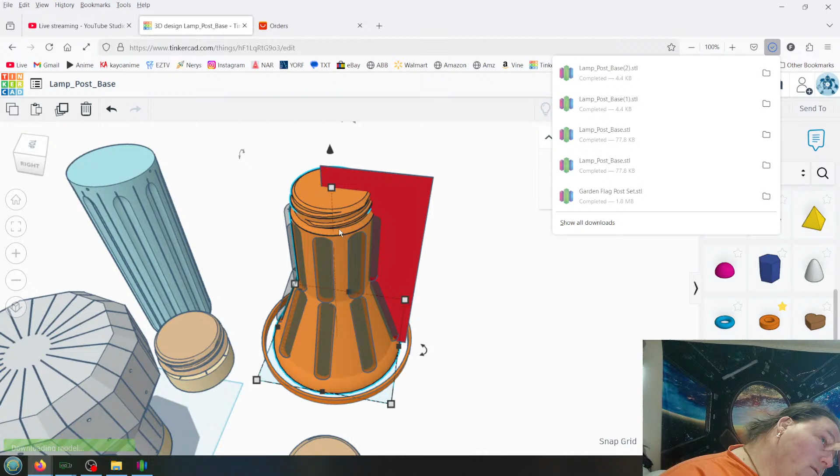Why? It's a simple part, why is this taking so long? There, finally. Nope, not export, I need to import. Choose base 2, import.

There we go, this one looks clean to me. I could clean it up a little more. Do I want to? Yeah, I think I do, just because I can, and it's not hard.

Okay, so 0.02. Just get rid of this because I don't need it. Take this and merge - there, that cleans up that edge a little bit. So let's make this a different color, obviously, and then we join it with this one.

You go there and there and there. Delete the red one. Turn this into a hollow. Grab that, duplicate, rotate, 22 all the way around.

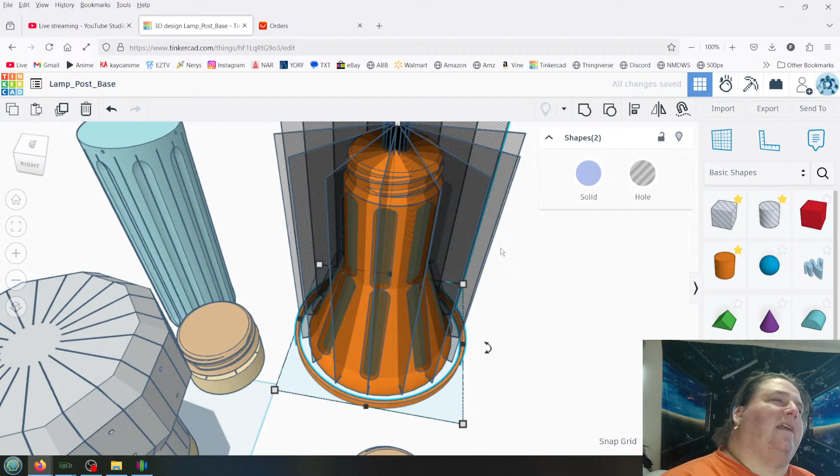That's a problem. No, it's not, it's on the outside, so it doesn't matter. Okay, let's take them all, join them. Get rid of the ring. Join it with the base.

Good. Join these. Good.

Now the only problem is these might not line up when you thread them together. I don't think that's important enough for me to worry about, I don't think anybody's going to notice. I don't know what the temperature is here, it gets pretty warm during the day.

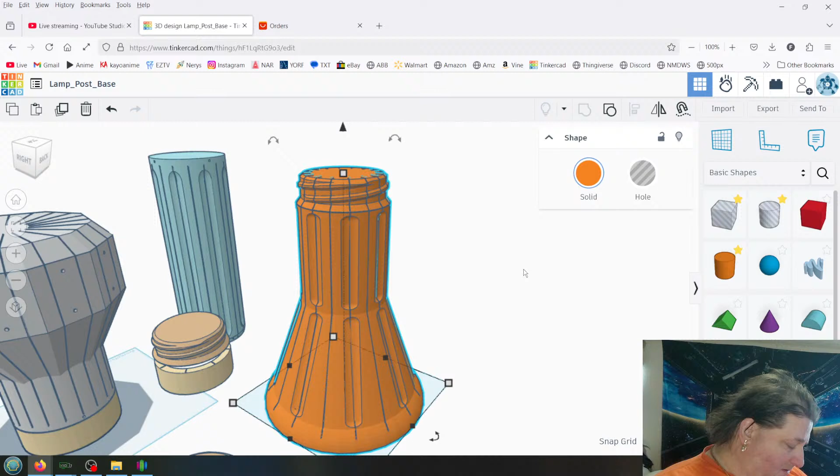I don't see the weather on that phone. Where's the other one, it's over there? It's like 40 degrees during the day, but remember we have no humidity, so it's chilly as hell.

It's about 50 degrees inside my house, a little colder in this room. It's 50 in the middle, so probably 48, 47 here. It's almost refrigerator temperature inside my house. But nothing I can do about it, I just got to deal with it.

Let's delete those. Let's export the base.

At night we get down to like 11 freaking degrees. Oh my God, it's so cold.

Ooh, wait a minute. I gotta delete the existing one. Add the new one. That's more like it.

This is the heaviest component, 752 grams. But I want this component to be strong because it's got to hold all the weight of everything above it.

And that does look a lot better, nice and smooth there. Yeah, I like that, I'm glad I fixed that.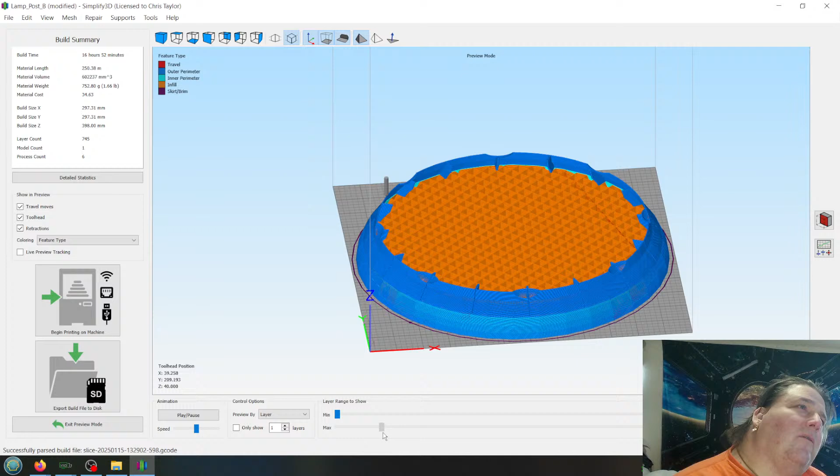Boy, why did it jump all the way over there? What? What the hell is that? That doesn't belong there.

Oh shit, look at that. We got a big old error in the model. Okay, this needs to be corrected.

Why did it do that? That's annoying as hell. See? It's not supposed to be there. Why are you doing that?

Let's try just remerging it now that we have a new workspace. And let's rotate it 22 degrees, because sometimes that's all you need to do to fix that.

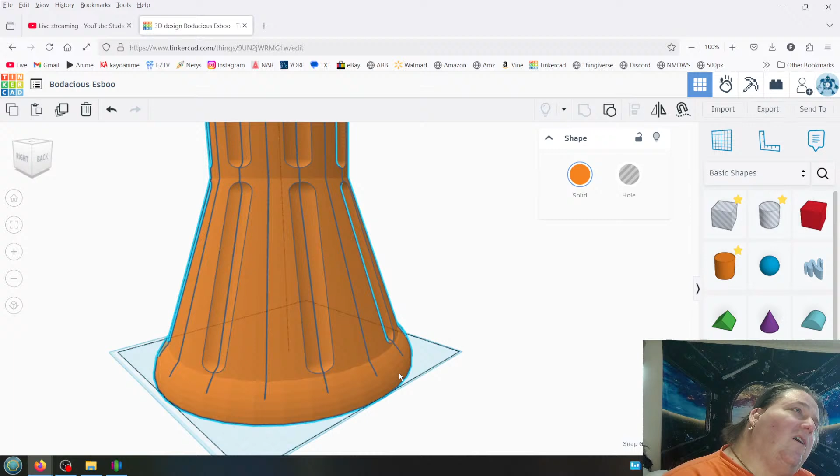There we go, glitch gone. That's annoying when it does that. That's a Tinkercad idiosyncrasy when you get really complex models.

Why is it making those noises? Much better, no stupid glitch. Pain in my butt.

That's more like it. See how the tool stays where it's supposed to? Once it starts the vase mode, it tends to stay in one spot. That's what you want. When it starts jumping around, you know you got something going on.

Okay, we're good. Lamppost, G-code. Let's do a backup.

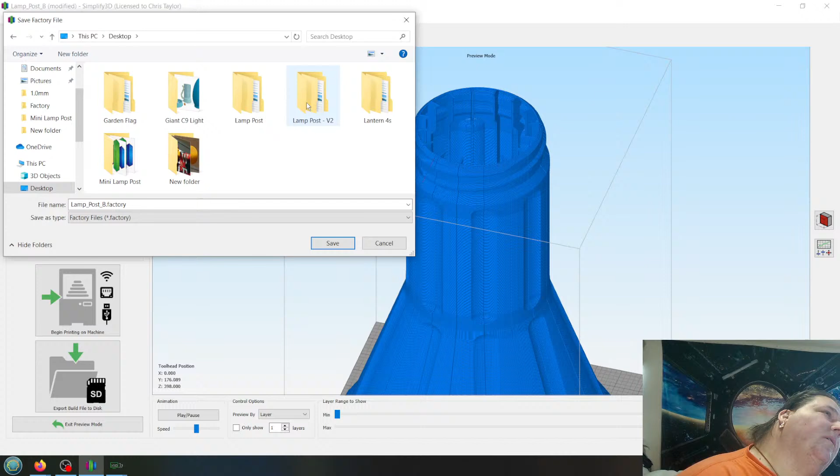Export. Let's see, desktop. Lamppost G-code B, and we come back out to here, go to Lamppost V2 G-code, save. And then save factory file. Lamppost bottom, and then come out to V2, factory bottom.

Alright, now I just need to do the other portion in order to fix that. Hang on, downloads. Lamppost base. Lamppost base.

Okay, let's go to, where's the one? Here it is. I'll try to merge them at the end if it'll let me. I can delete that now.

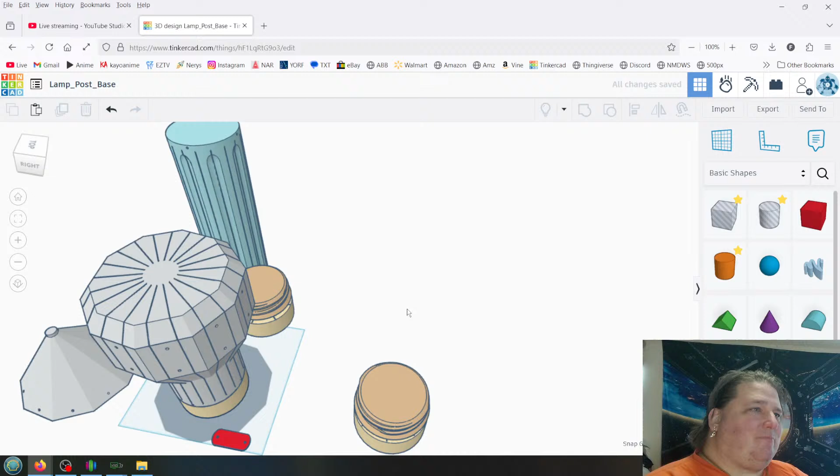Okay, so the next thing is to do this one. First we need to decimate. Delete you. Delete you. Did I get them all?

Yes. Delete you, whatever you are. And then separate, I don't need you anymore. Excuse me. How did that get modified?

140. Decimate. Come on, split. There we go. Okay.

So I can just keep this like it is. Let's do this, let's do that. Now raise this to 47. So that's 47. And then take this, and it is...

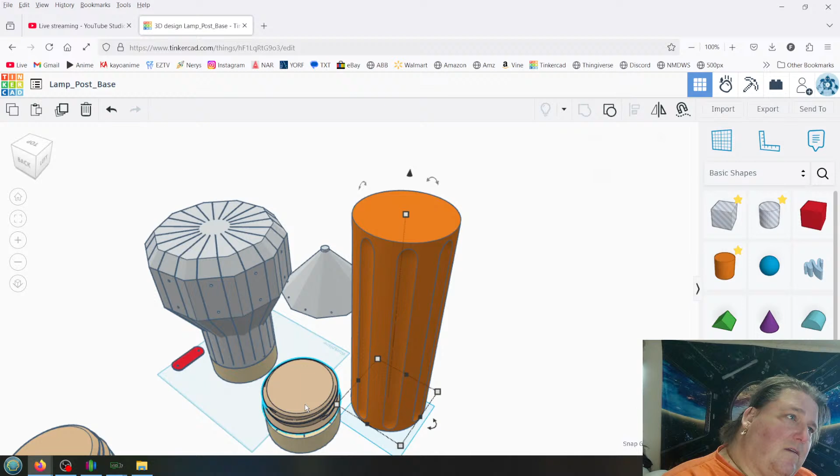437, that's too tall. This is 41.39, let's call it 42.

Hey, Caden. No problem, thanks for checking in.

Okay, so 400 minus 47 minus 42. This needs to be 311.

And if we do this, we change this to negative 0.2. And we take this, this, and this, and we center them on the... why do you do that? This.

There we go. That... 399.19, perfect. Now we just need to put our cuts, so these two will join together.

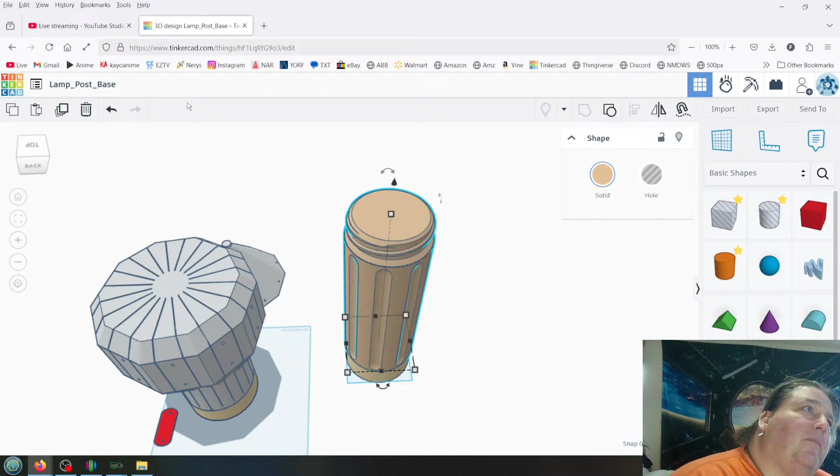Actually, before I join them, let's do an 11.25. The hell is that? 47.

Good. Now we join these together. Actually, I can make that real simple.

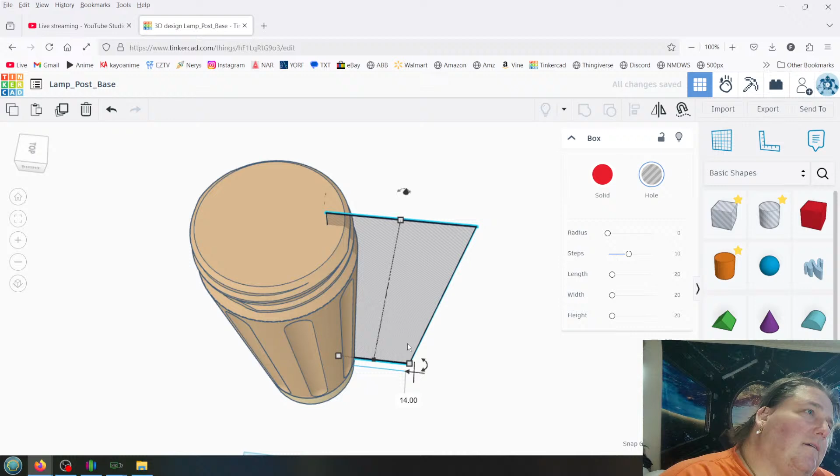Definitely not enough. Yeah, that should do it. That should do it. Let's do the master ring. Radius, steps.

Okay, let's do it. Oh wait a minute, I gotta adjust the bottom. Yep, that's not gonna work. No, that's not gonna work until I adjust it.

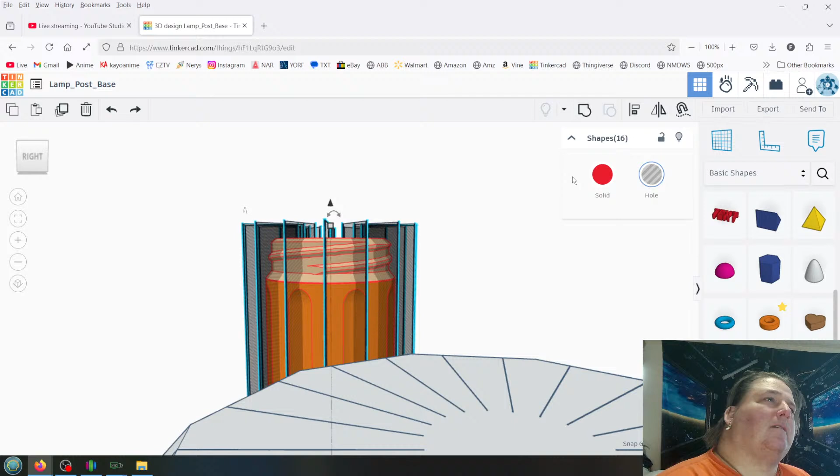And just scale it. I need to bring you to right. Why is this not working right? Why can't I move that more?

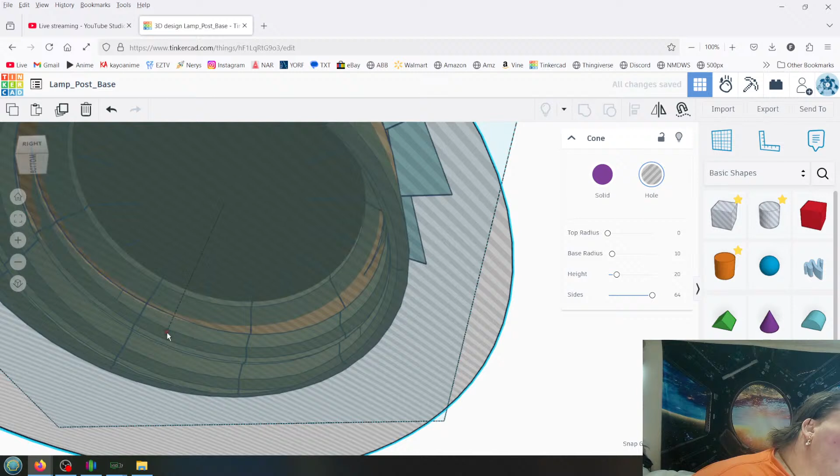Okay, take this and this, join it. Hole. And now join everything. And gimme lamp post mid.

That should do it. I'll work on the rest of it later because this will let me start printing right away. Okay, lamppost mid. Lamppost mid.

Delete. Delete. Let's do no zones. Let's do the whole thing at 0.4.

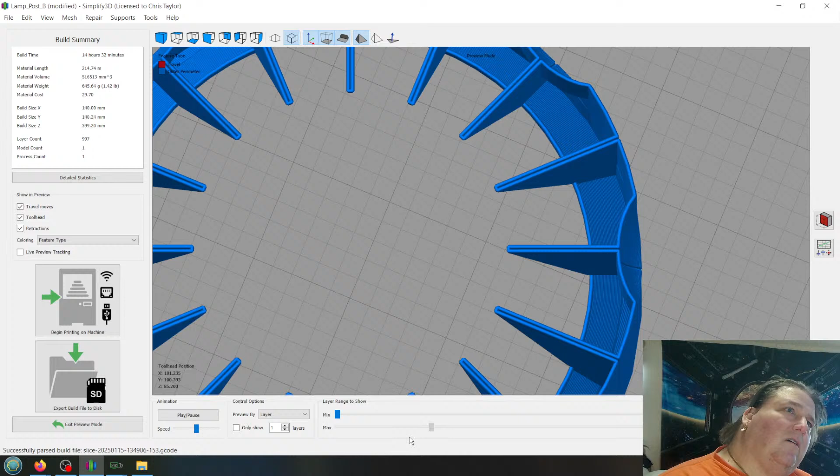But I don't think I need to worry about that because I'm about to get rid of most of that. Yeah, that's way too much. That's just wasted plastic, it's doing absolutely nothing. Ooh, it's weird when it does that.

So I don't need this. What I need is a cylinder. Why do you keep doing that?

Smooth sides, much bigger. Uh-huh. Uh-huh.

Okay, so we make this bigger there. We'll probably make it a bit bigger. Yep, right there. Now we shove it up the ass.

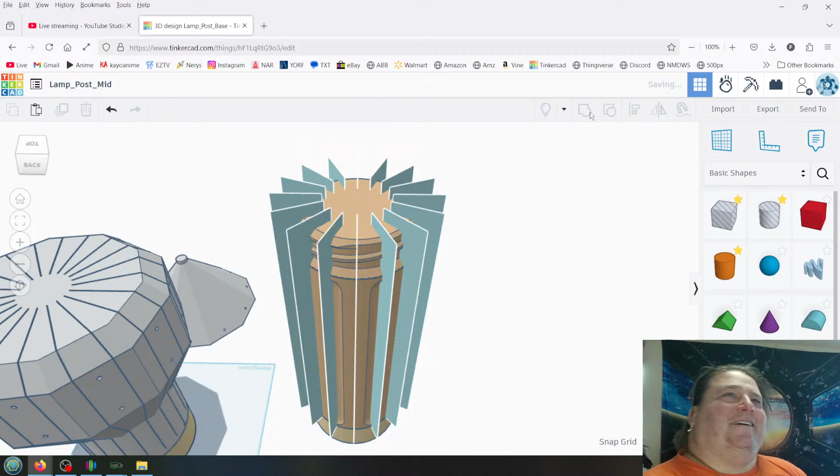Lick it. Much better, that was way overkill. There we go.

Much better, much better, much better. Yeah, they simply did not need to be that aggressive. Yeah, that works. I can make that circle a little bigger, but I'm not going to, so I don't care. It's just not that important.

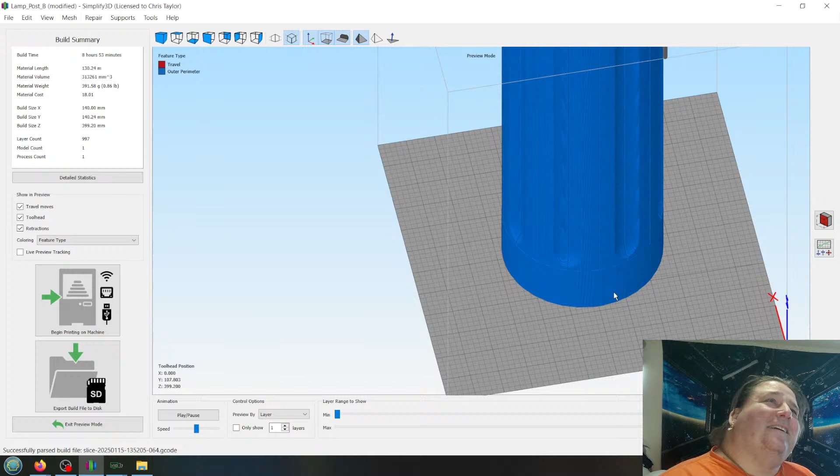Good. Good. Excellent. And that only takes 400 grams of plastic, 9 hours to print. Not bad.

Alrighty, file. Let's see, desktop. Post G code. Nope, we're doing factory first. So we're going to do mid. And then export. G code, mid. Good, I can start printing this.

And while this is printing, I can work on the top half after I get warm. And my hair's all over the place again. Alrighty, that's it, I will see you guys later.

Once I get the lights in for this, I'm going to make a dedicated video just for this, with the proper lights on there once I get them in. And then I'll also do a test print of the garden flag first, because that's a fast print, that'll take like an hour and a half.